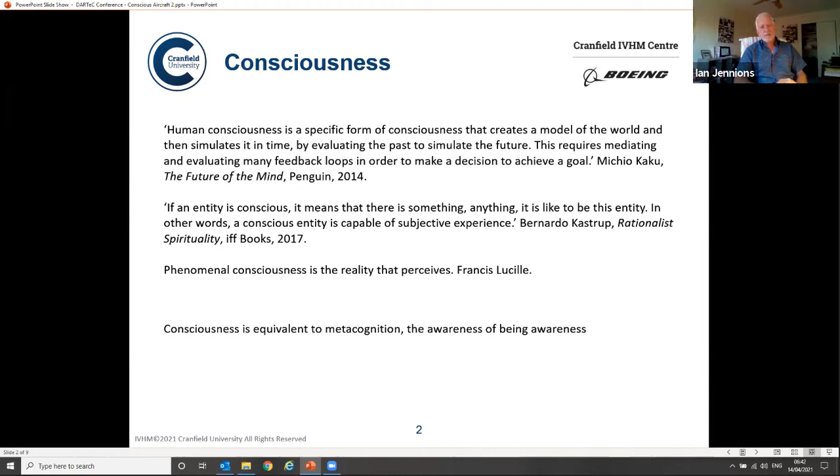So let me unwrap that for you. Let me take you walking down your favorite high street. You're walking down, you see people around you, you see cars in the street, you can smell the smell of coffee maybe—if you're in the UK, it'd be fish and chips as well. But you're aware of what's going on around you. So we've got that. But not only are you aware of what's going on around you, you know you're aware of it. And that's the awareness of awareness.

So as a working definition of consciousness, that's what I'm going with. So can an aircraft really be conscious? Given this definition, probably not. But we can start at the right-hand end and work backwards. We can certainly provide it with a lot of the ability to be aware of itself in the first stage.

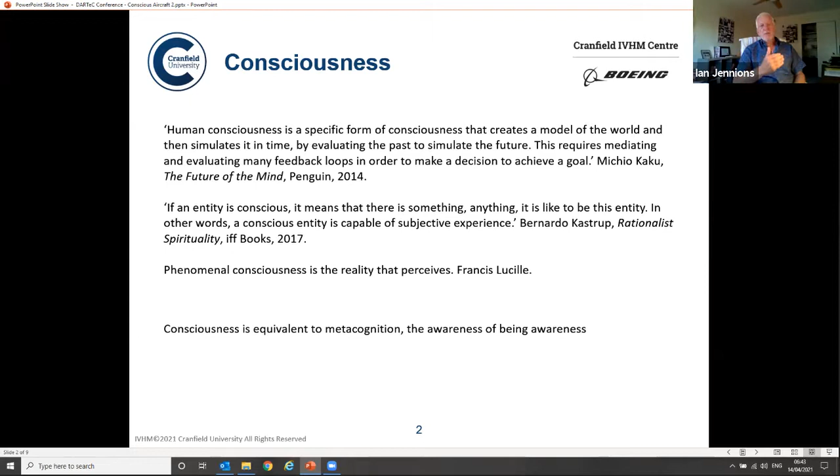But before I move on to tell you how we framed this project, let's just take a look at the rise of computer power. Now, you can plot this however you like, but whatever it is, it's quite phenomenal. AI, artificial intelligence—you can argue, and a lot of this I'm cutting through, there's a debate to be had on almost every slide and maybe every topic. People have debated the A in artificial, for example. But this is the progress we see through the years.

It took another 20 years for a computer to beat somebody at Go, so that's 2016. That may be because of the complexity of the game. Chess has got an opening of 20 moves, Go has got an opening of 361, and it doesn't really get much simpler for those who have played it. Or it may be because the game is simply not as popular as chess.

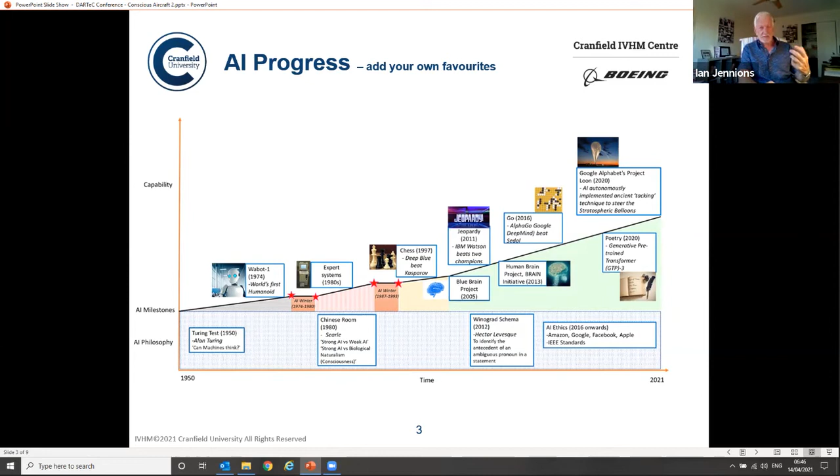So, okay, we have some of this. How are we going to make this in some way concrete and bring it to a project? The vision that we have is very much around maintenance and operation of aircraft, it's in health management, that's what my field is. But it's really, how do we treat the aircraft more like a human? What would we want to see from it? How would we want to do the handshakes with it? And so this is the sort of vision we have here.

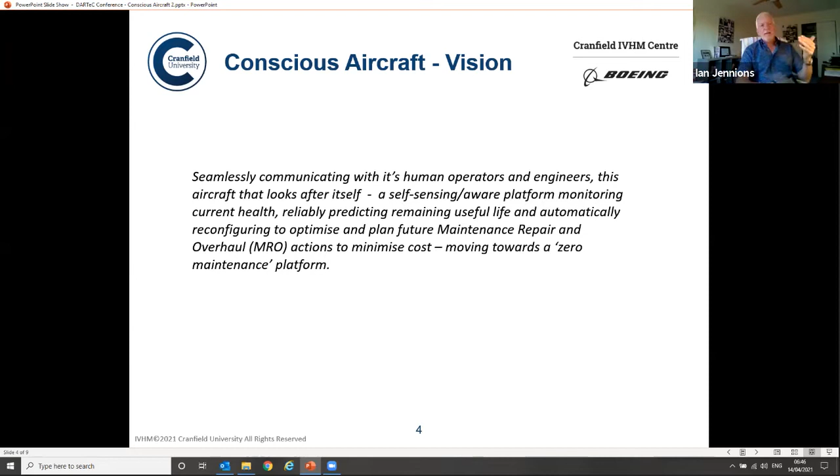I should also add that, of course, we're doing this for the vehicle. So Nick was looking at this in terms of the engine and other systems, but we are deliberately looking at it from a vehicle level.

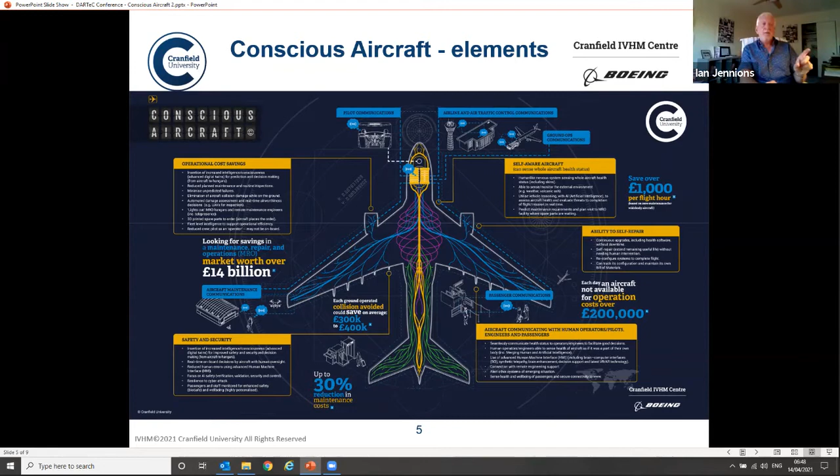So now what I want to do is actually look at what that means and how we've taken that forward in an individual project. I want to just take the intelligence side. We've got the MRO going at the same time, the maintenance, repair and overhaul, but I just want to take a look at the intelligence side.

So what progress have we actually made on this? What you do in academia is you look around and see what you have. Coincidentally, we've done a PhD that's almost in this field, and that's what we're going to leverage.

So what we've been looking at in this PhD is the ability to reason. It's inherently human, but when you come to program it, it's a lot of if-then-else statements.

And I had to put this quote in because it's my favorite quote at the moment: Algorithms are opinion turned into code. I just think that's absolutely brilliant. The book is 50-50 as to whether you should read it or not, but I just thought that was a really good quote.

So our progress has been based around something called FAVER, a framework for aerospace vehicle reasoning. Cordelia Ezhilarasu did a PhD in this, and this is very much her work. Cordelia finished her PhD at the end of last year and has since joined as a postdoc.

So what it is, it's a framework for exploring reasoning and can be used as a virtual twin, digital twin, whatever you want to call it, to explore the concepts of the conscious aircraft.

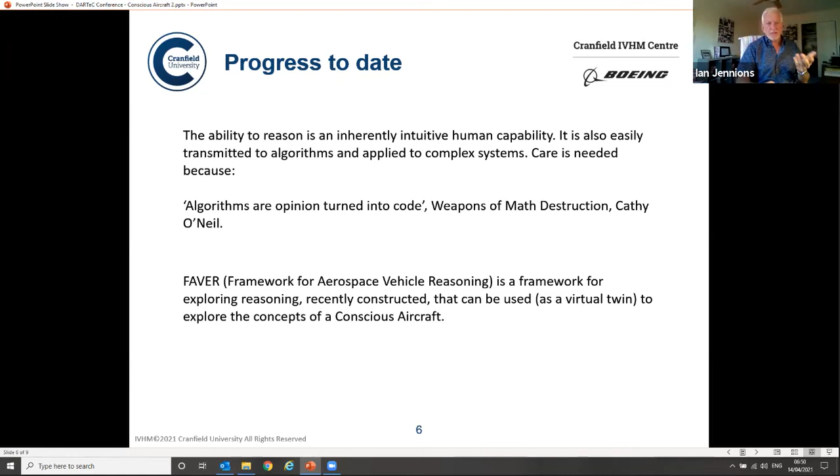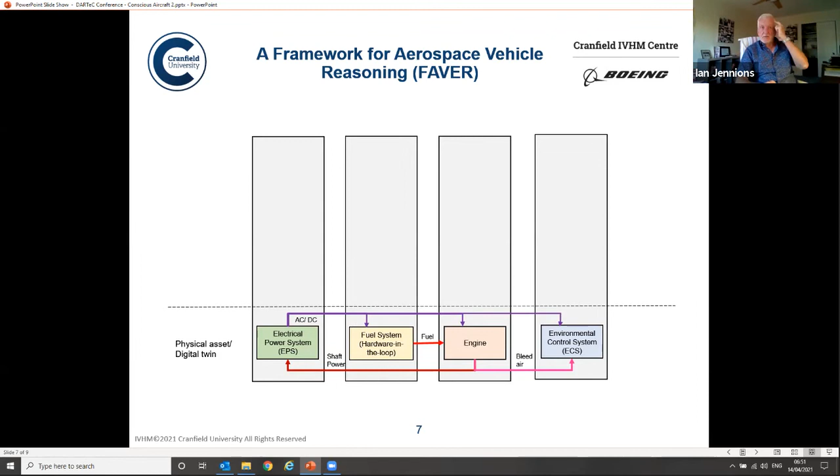Now, historically, these systems have been diagnosed through stovepipes, and that's what we see here. As I said, the bottom level is the digital twin. It could be the physical asset as well, but for the moment let's just consider it to be the digital twin. We then build on that with the number of fault modes we're going to detect in each of those systems, and then the system diagnostics that are going to detect those faults. So we're totally consistent in each of the columns.

What we can't detect, though, is any interacting faults between these systems. And we can't reduce the number of sensors in one system, because we can't detect something that's gone wrong in that system from another system.

So what we do is we form what I call the vehicle system symptom vector at the top, from all the sensor data we've connected. And we do reasoning with that vector as to what's going on. I'm going to give you, hopefully, quite a short explanation of what that's about.

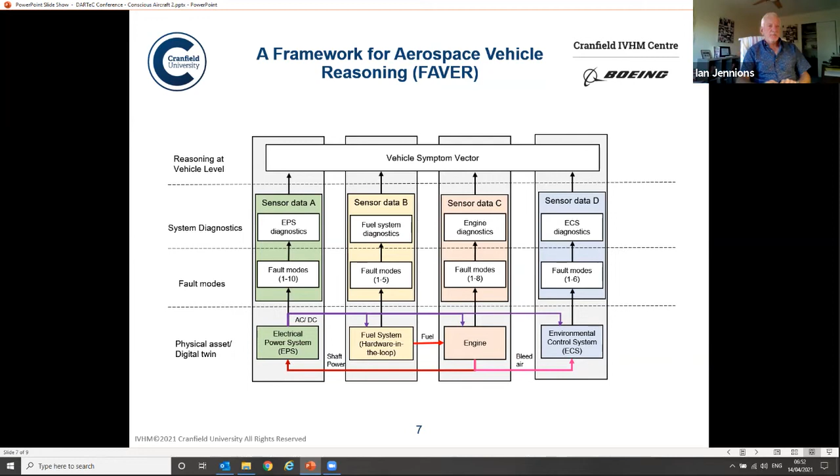So I'm going to examine an actual accident scenario. This was an Airbus A319, and it was flying along, and one of the engines' bleed system failed. Unfortunately, and this does happen, I'm not quite sure why we don't have interlocks for this. The pilots then shut down the bleed system from the good engine, which meant the cockpit and cabin depressurized because it was getting no air from the environmental control system. So the oxygen masks deployed, there was an emergency descent to 11,000 feet, the APU started up, and eventually they stabilized at 15,000 feet. So let's take this as an accident scenario, that the bleed system failed, and take a look at what possibly could have caused it.

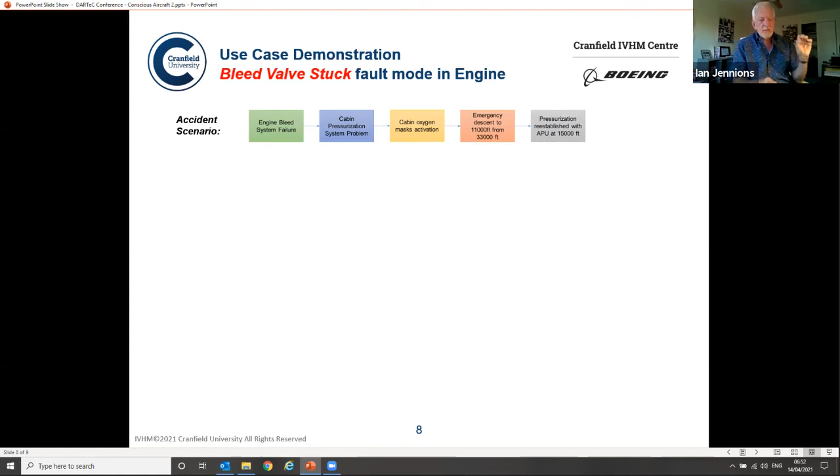Well, the first possibility is a mechanical problem: the bleed valve partially stuck open. So again, we have the 4 systems we're examining, and green means everything's working fine. The EPS is providing the fuel system with power, the fuel system is providing the engine with fuel, etc. Except that now the bleed valve is stuck, there is the potential for low bleed air pressure in the environmental control system, and this is through a mechanical fault.

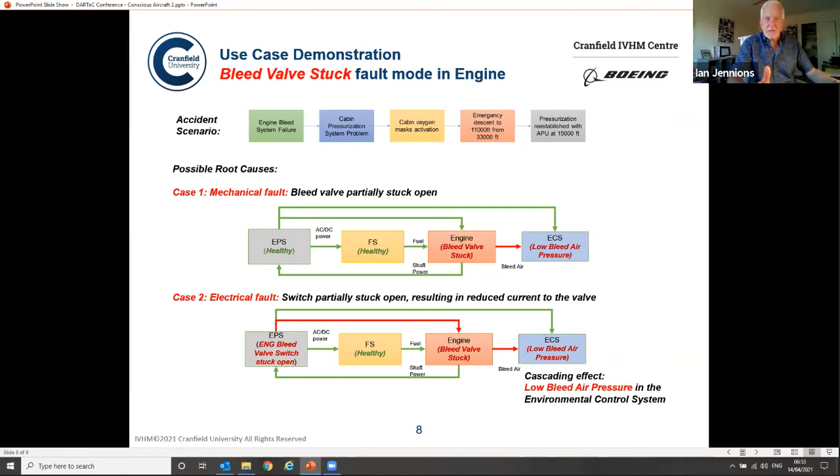The second case is that this could actually be electrical. So what could have happened is the bleed valve switch could have stuck open, and that could have caused the problem in the engine, which caused the problem in the ECS. I hope you're with me so far. So which one of these two is it? And do we know how this fault would actually propagate if we ran it forward in time?